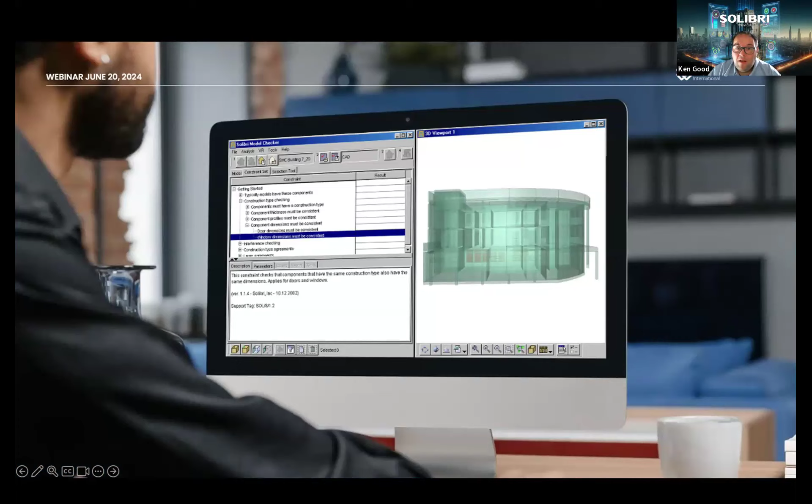Even at an early stage, if we look at this old school screenshot, which I really wish I knew more history of, what version and operating system it was, there are items in there that are clearly recognizable today still: the rule sets, the descriptions, the parameters, the 3D view, the toolbars. Those are still common themes that we see today in Solibri Office.

Moving on a little bit beyond those early days, the relationship and how we actually worked with IAI as it was in the early days before it became buildingSMART, that started early on in 2002, and then as names changed, 2X3 became the predominant version available. We've been involved through all these versions, and then in 2009, the start of the development of the BCF standards.

We worked on that, or Passy worked on that - the guy in the middle from the previous photo - along with Tekla to develop that standard, and today that is now our preferred communication format, whether it's an offline file or through the cloud to some sort of online CDE.

But coming back to the guy in the middle, still in the middle, still wearing a jumper - there is a story behind that, but I'll leave Passy to explain that one.

This relationship continued over the years, but in 2022, Passy was actually awarded an honorary status as a buildingSMART fellow for, and I need to read this bit, significant contributions to the work of buildingSMART and the advancement of BIM. So Passy's been involved through all these years and has pushed many different things, and he's still involved today, continuing with new buildingSMART standards like IFC 5 or IDS more recently.

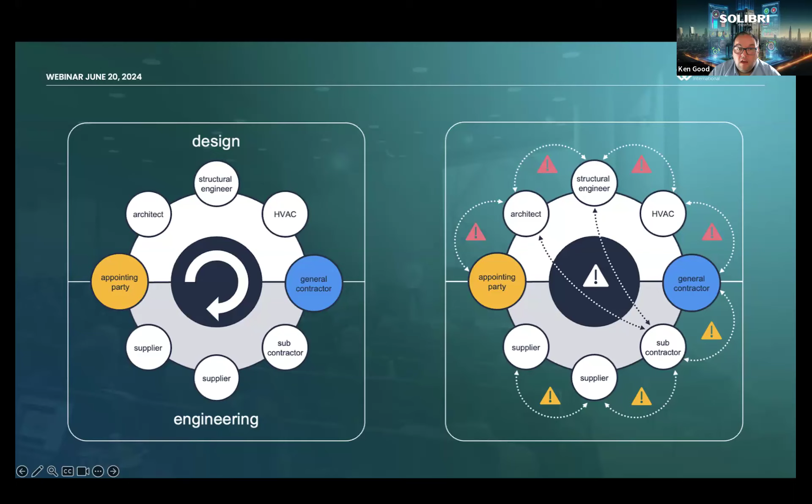But the main thing to summarise is Solibri's place in all of this: we allow project partners to validate, coordinate the various different models from design, engineering, different disciplines, wherever it is. Doesn't matter what authoring tool they use. Because we're basing it on IFC, people can use a preferred tool, export to IFC, and then that's the basis for the various different bits and pieces of checking that can go on from there.

We can also communicate on all of the major CDE platforms. We can use BCF, the Documents API, the OpenCDE standards. We're trying to be as open as possible to allow as many people as possible from different backgrounds, different platforms, all to be able to communicate and collaborate on projects. And even lately, the IDS, the information delivery specification, is becoming more to the forefront of things - we also support that platform as well.

So what I'm going to do is wrap up that brief history of Solibri. There's no point me talking about it because we have Daan here who can give his insights from a user's perspective. So I'm going to hand over to Daan from JaJo's, and he can share these insights from his own perspective.

So let's have some use cases on how JaJo's uses openBIM for our collaboration. Not too much about me, but this is me - I am Daan, I have over 20 years of experience, more than 10 in the BIM industry. Related to this, I have co-created the BCF infographic, which we will talk about in a minute.

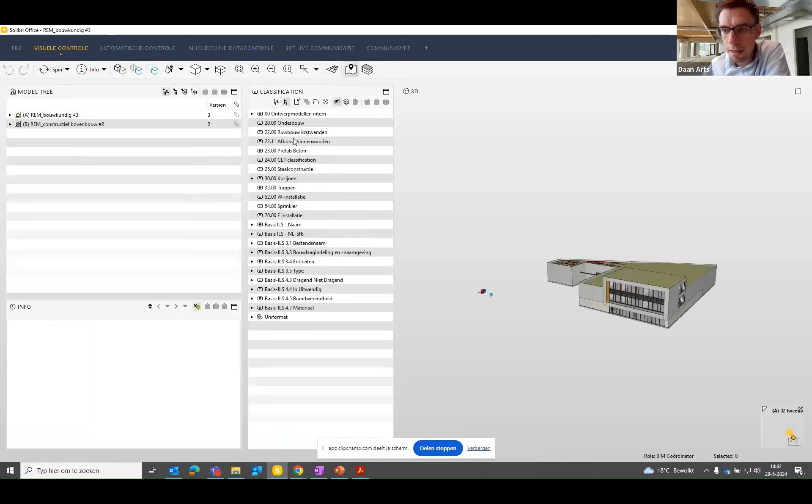So we're synchronizing those two models in Catenda. That part was actually real time, so you can see how quick that is — that's really amazing. What you see there on the left is the same name and revision number as in Catenda, so that means there is no discrepancy between what we're doing.

So that's already awesome. Okay, what you're seeing here, maybe it's going a little quick, is faking an upload of a new revision, and then it uploads that in the other software as well. You can see it has the same revision number again as in Catenda.

Can you see my mouse, by the way? Can you see this? Håvard, can you tell me yes or no? No, you cannot see my— okay.

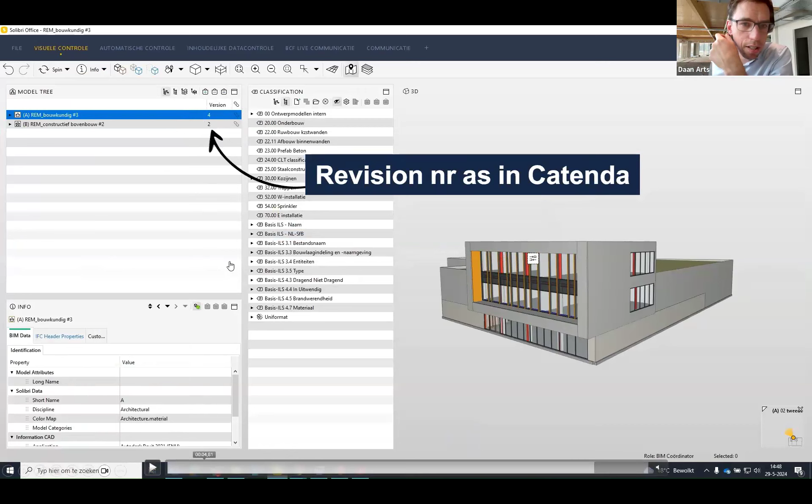All right, but anyway, so what you see here again is the same revision. We're collaborating between two platforms, which is, again, in my sense, really amazing. So what you did see is synchronizing models — it could have been documents, PDFs, or whatever, but we synchronized models. What you didn't see is uploading or downloading.

So this is what's happening. We're going up and down without any downloading into your Explorer and then uploading into somewhere else, and a lot of work placing documents at different positions. We're synchronizing together, and I think this is very powerful. This makes our engineers' work very comfortable.

So let's move on from this. How does that help us? It helps us eliminate discussion on revisions, again, because we're synchronizing. There is no downloading, there is no discussion, and it prevents unnecessary mistakes.

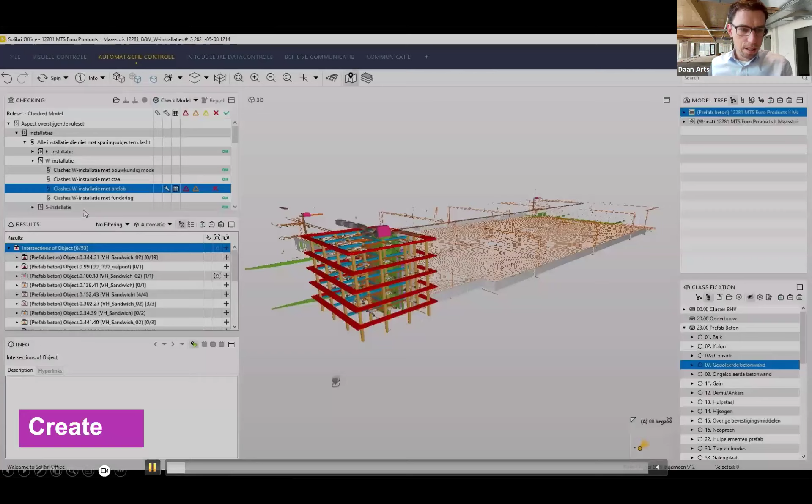So now we're using Solibri again. This is where I use some advanced rule setting, but we're not going to talk about that today. We're talking about this. So I created an issue.

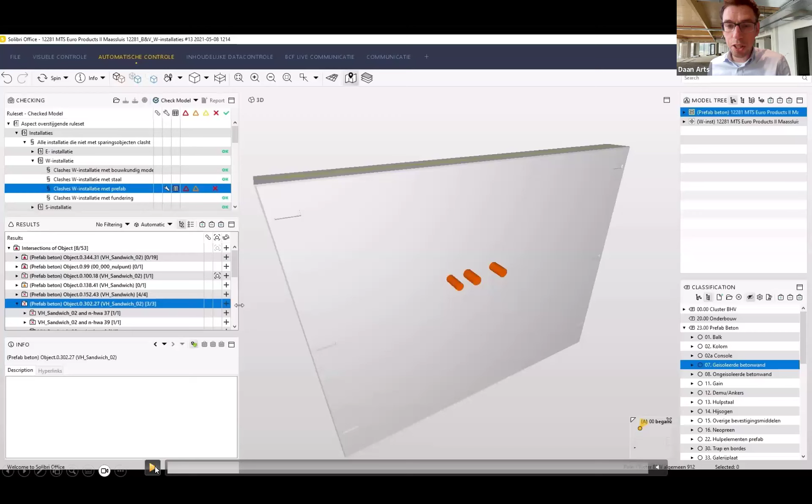As you see here, there is a concrete wall and there are 3 pipes going straight through it. That in by itself is interesting enough. So we're actually visualizing a problem. Next step is to create that topic or issue.

Those names are kind of mixed together. So we're creating a name, we're creating a description of that topic. We are then, when the description is finished, going to add a status, so metadata, and a responsibility.

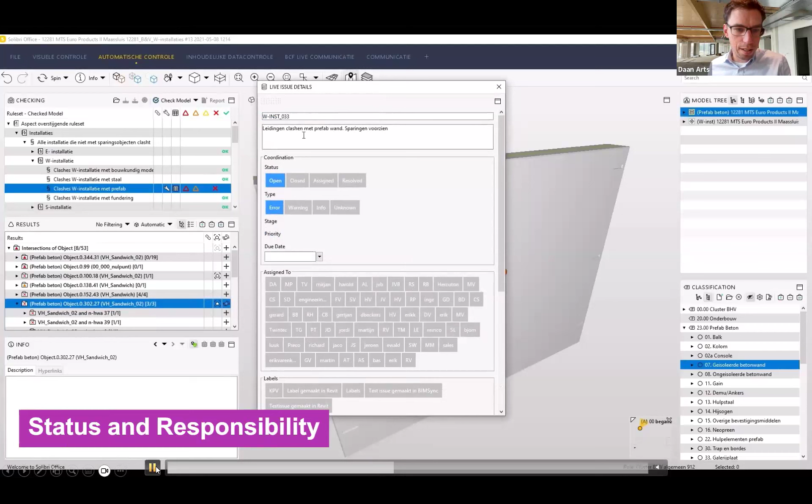And that is obviously very key because, again, when you're emailing it, you're not really sure where that is all going. But if you're now attaching somebody who's responsible, that is very powerful because you know exactly who's responsible for what, and this is the key part.

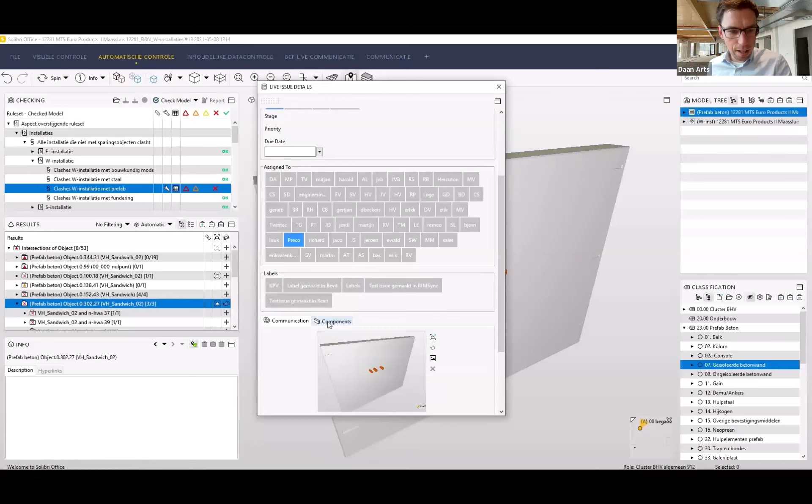These are the components. All right, so you see here components, and those are the things you see on the screen, and those are obviously when we're talking about BIM, these are the most important.

All right, and now the best part is again communication between 2 vendors. We're synchronizing this through openBIM, in our case with Catenda, and here you see all the communications I have in this project.

I click on that topic, and what you see here is the same name I just typed in, the same description, the same status, the responsibility of that person or group, and all the objects. So I'm using 2 different softwares, and I'm doing exactly the same thing, and we're talking about exactly these objects.

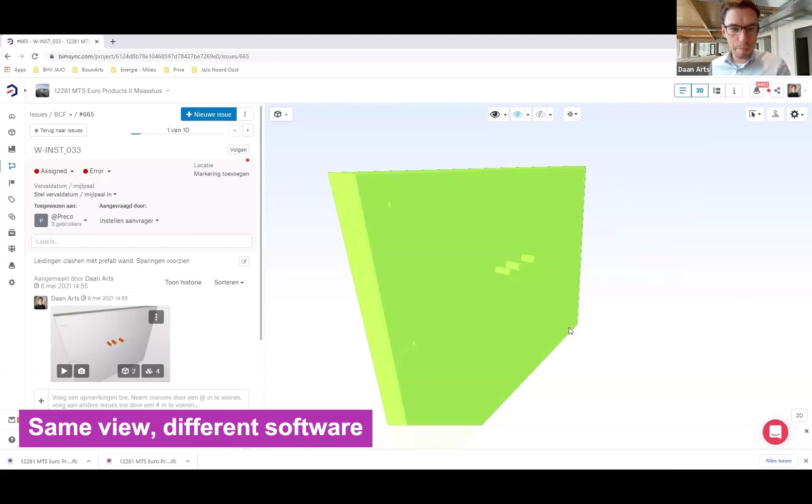And this is in a different vendor, but I'm straight away going to this problem within my BIM. So that's obviously amazing because then I know exactly what the guy who made this issue is talking about, because he's talking about this wall, not a wall, this exact wall, and these 3 pipes. So same view, different software.

And I think it's been out there for a while, but we see that a lot of people are still not using these types of communication. And then we feel this really is a great thing.

But go out and check that website. There's also some manuals which will tell you and help you out how to use the BCF in your vendor software. So volunteers got together and created manuals for instance, Solibri, but also for Revit and for Tekla and ArchiCAD and all those kind of systems. We have manuals which tell you how to use BCF properly so you can communicate in an open way.

So that'll help you out. Finally, I hope to inspire you that open communication and working with this open standard is not just done with clash detection or the things that Solibri is known for best, but we at JaJo use it in a couple of different ways as well.

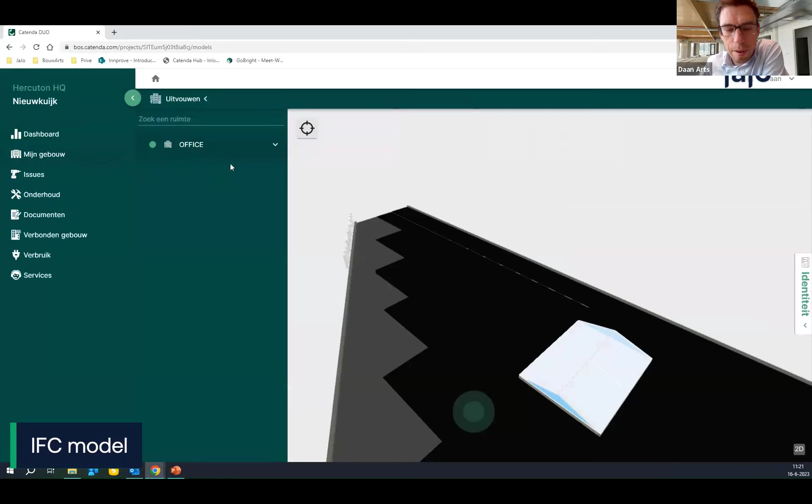This is one of our offices that you will see here. So we're going through the dashboard, and eventually we're going to simulate if I have a problem in my building. So this is now a web version, but this is also on your phone, so you can scan the QR code and go directly to your room and create a problem or a leak or whatever it is in your building. So doing digital twin kind of stuff.

So we can walk around the BIM, that's great. So there are 2 functions here.

There are 2 main functions. One function is that button which shows the problem, and then there is a documents button. The documents button is really cool.

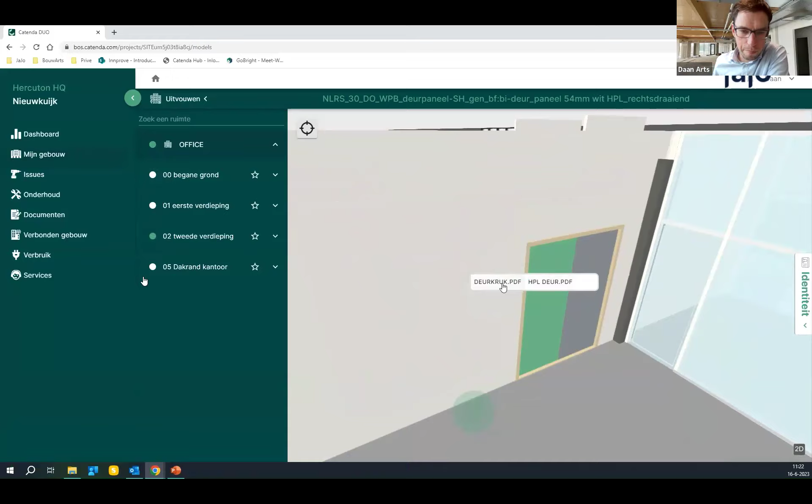It seems so simple, but anybody who's ever done maintenance knows that when you get a call about a problem with a door, their first question is: what door? And the person on the line says, yeah, exactly, what door? I have no idea, just come over here and fix it. So you drive over there, look at the door, and think, yeah, you're right, it is broken.

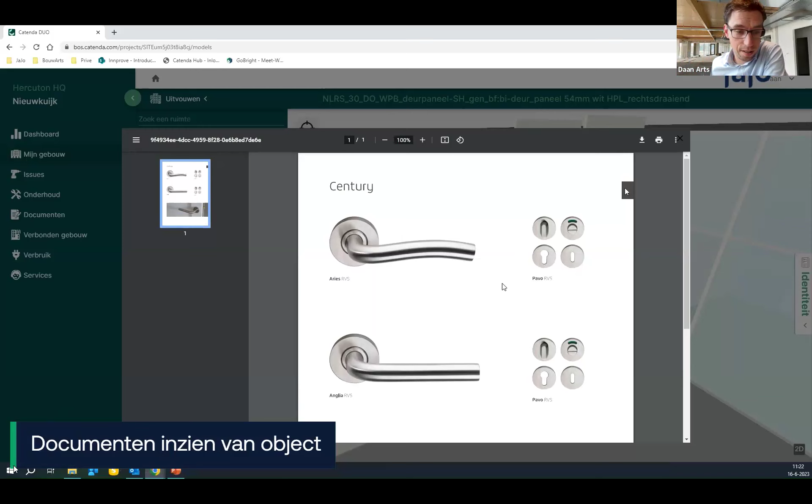He writes down whatever he needs and drives back again, hopefully doing that relatively okay. But what you saw here is you do that same thing, except you click on literally the door that is broken, and the documentation of that door and everything around it is directly available. That is huge. I've talked to my maintenance guys and they say this is going to save us a lot of time. That's step 1. That is actually not the BCF part, but just a cool feature I love to show you guys.

So it's an open standard, which is important to us. And why is it important to us? This is part of it, because it flies directly to the object it refers to.

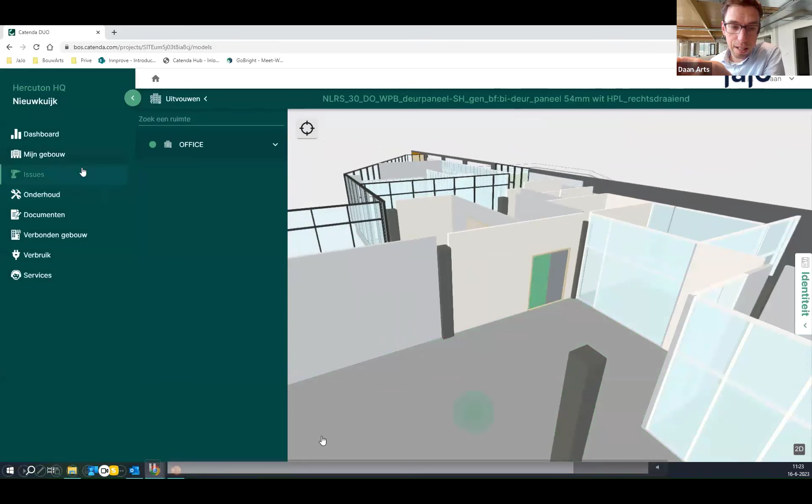And the second best part — this is all the list of all the topics — is that because it's open, the programming to our software and our ERP system is a lot easier, since we know exactly what to expect in the code, because it's already written down in the open standards. So we create tickets for our buildings with open standards, and they go directly to our own ERP, which is made easy because it's open. That makes it a lot more cost effective than programming another program.

That's use case 1. Well, I think that's the same, so I'll go to the next one. So number 2 — how to translate that one — let's just say project management.

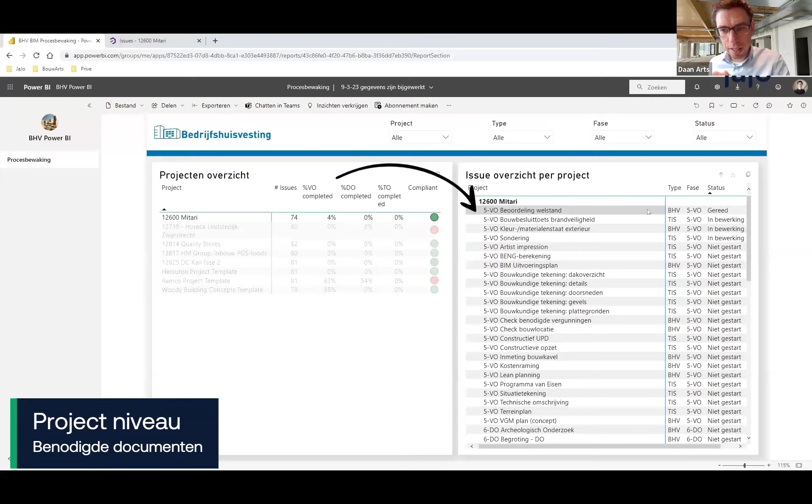What you see here is project management — a couple of our projects. On the left you see about 8 of our projects, and on the right you see topics of that project. Instead of going into one project and seeing all the issues, here we can see all of our projects at once. That's quite cool — we use all the data we have in Catenda and access it in our Power BI dashboard.

And again, because it's open, it's easy. This is just one project — the Mitari project you saw just now. Here again it's the same data, but without entering Catenda. We have our own Power BI dashboards with access to all our Catenda projects, and there we can maintain what the status is of our documents.

So the use case here: you see names of documents that we need to finish at some point in the project. It's like a project management tool, and we can change the status, change who's responsible, and set milestones and so on.

Because we can do this for the project team, which you see here, and just now with the Power BI dashboard, our management can have proper insight into all the projects in one dashboard — what is the status of all the projects. So we can have a lot better insight. That's what we do here. Hopefully that's a fun use case for you guys.

So let me just finish that video, which pretty much shows you exactly what I said. Again, open standards, and we can do everything. We have a lot better insight.

All right, final video to inspire you a little bit is not this one. There you go, is restoring an ancient wall. That wall is about 1,000 years old. I guess that's not ancient, that's medieval I suppose, I'm not entirely sure. It's older than me, so that's old.

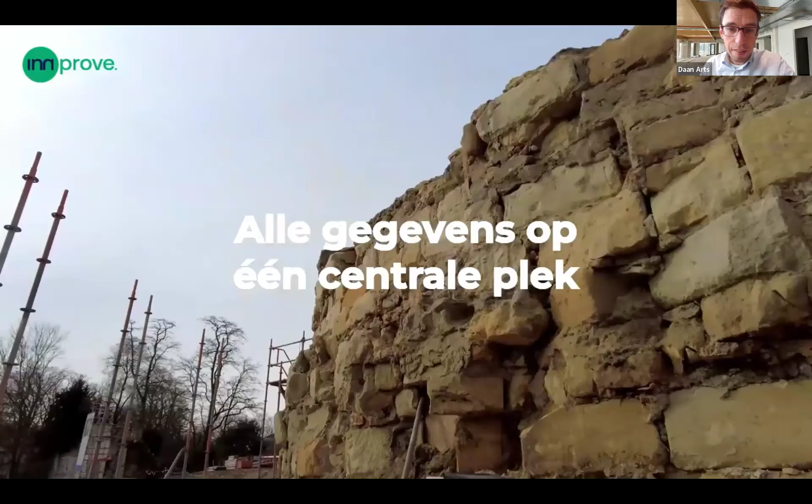So let me show you that video. So we registered every stone. Let me just translate that for you. We have a better insight into the entire project. We are working smarter, and again that's single source of truth.

That's what that said. And that's me meeting our project manager. Welcome to this project, and we have the restoration project here, which looks awesome, right? If you guys are into restoration, this is amazing. This is an old wall, again, almost 1,000 years old.

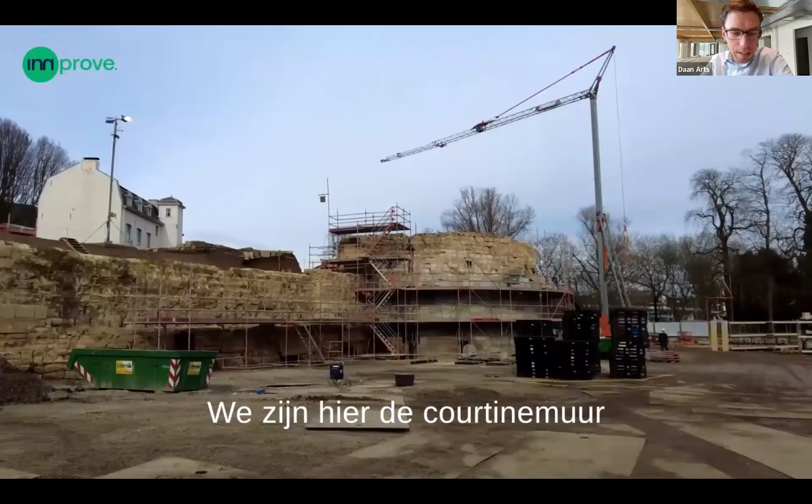All stones need to be taken apart and need to be stored. And you see that here, 2,500 stones are taken off that wall. You see the back and temporarily stored. So how do we do that?

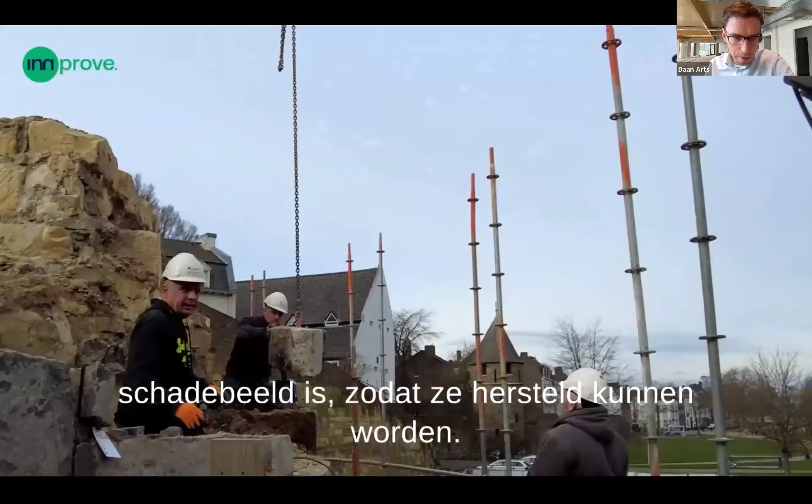We take one out, you see the guys taking one out. They put a QR code on that stone. We scan that QR code and go directly to the Catenda system, which then shows you all the information of that stone. You see that here? It's a QR code, we can scan that, and it goes directly into the system.

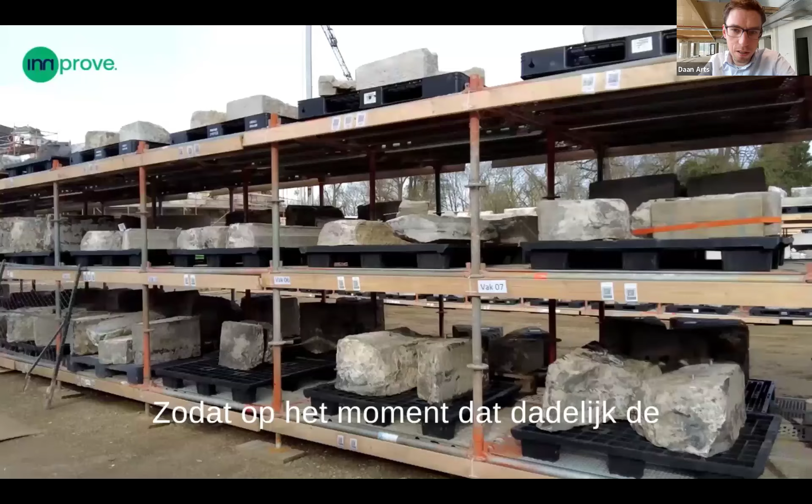And the system also says where those stones are stored temporarily. There you go, we're accessing it, going directly into our Catenda system, and we add some data to it. We can add pictures, there you go. And here is the temporary storage. Again, they can scan it and they know where they are.

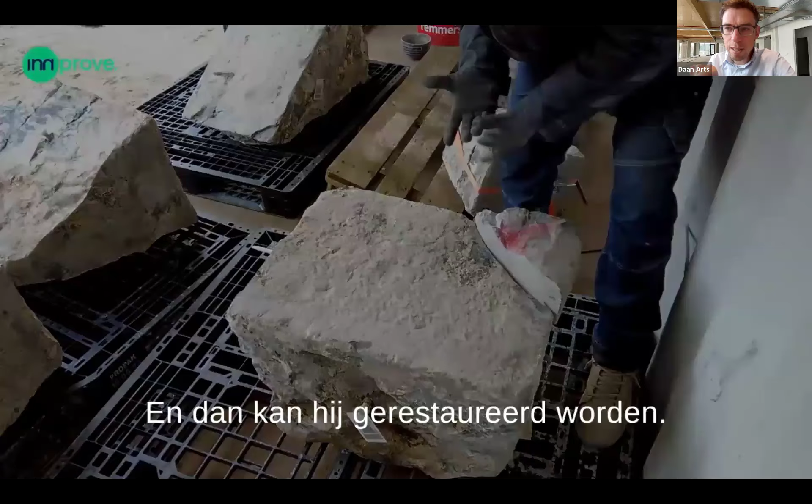Right now, this guy is restoring one of the stones. QR code is still there. While it's being restored, we change the status to 'in restoration' or whatever the status is. Goes back to its temporary storage and then goes forward.

So that's cool. So how do we use BCF? Again, this is the pages as well. These are all the stones, properly filtered, we can pick out any stones. Again, the same things you saw before with status and who's responsible and when and how and where.

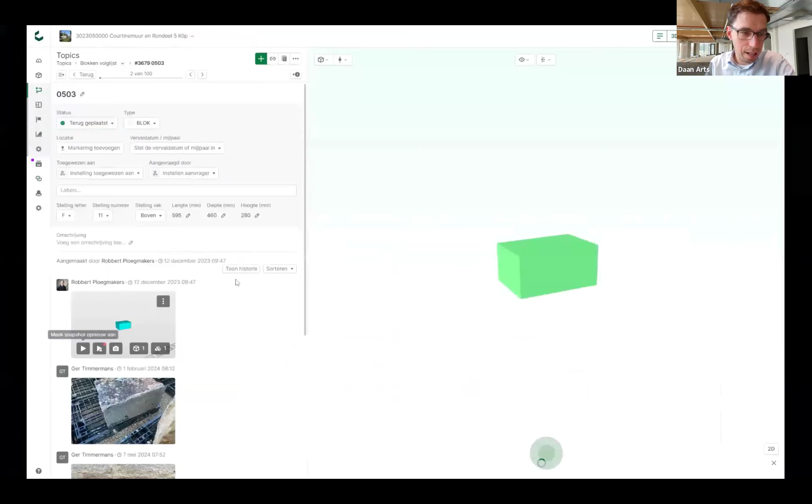It's all there. What you see here is the BIM part. We actually created that model of that wall in our model. So we're talking about that stone. So where is this stone? The stone looks like this. And that's the 1st of February.

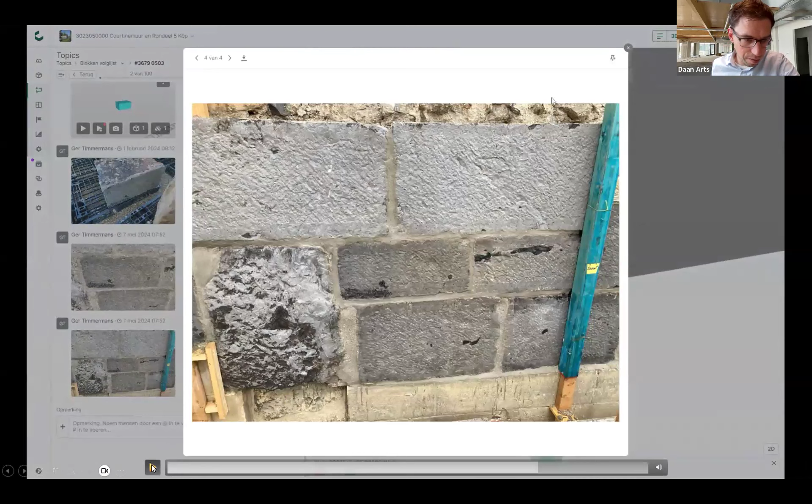Let me just pause that for sake of argument. Go back one second, oh you can see it right there on the left. And then now, the 7th of May, it is placed back. So we're doing, this is the 7th of May, and now this is the new version. So this thing is already placed back.

So there you can show the history of all the changes that's been made. We are tracking the changes. For those people who cannot read Dutch, let me tell you what happened.

He took out the stone. He then placed it into storage F11. It was then changed to stored. Twelve days later, the status was changed to 'we need to reuse this stone'. It's possible. And then somebody changed their mind - no, we'll replace it, no, we're going to reuse it. Somebody had a change of heart.

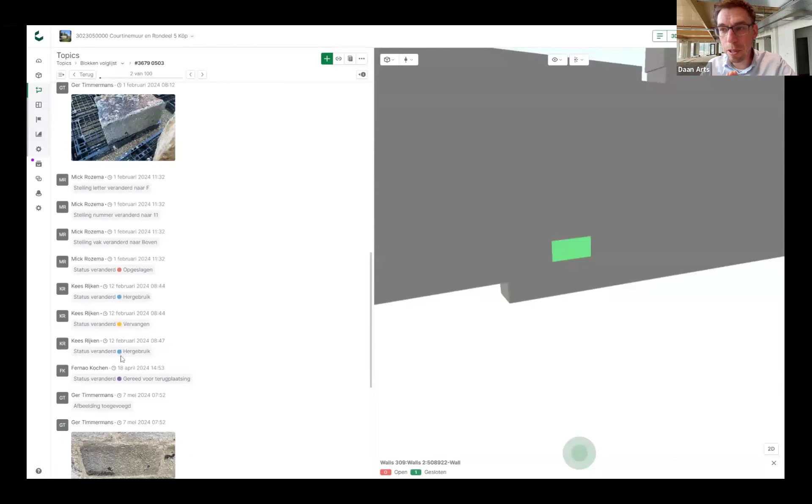Eventually, on the 18th of April, it was said it's good to go to place back. And then you see on the 7th of May that it is actually placed back, with a picture of the final wall. So we have a complete history of what happened here, and this is important because our clients are actually asking for this - what is going on, what's happening. And so this is a great tool.

So we're using existing software to make this amazing piece of simple admin, because admin needs to be simple, right? And again, we use open standards and BCF to create a management tool. That is what we did.

But to collaborate effectively with everybody, there is only one way, and that is to work open. At JaJo, we believe that, and that's why we chose Catenda, because they have the same beliefs, and that goes the same for Solibri, all based on open standards. So openBIM for us is the only way to collaborate with our partners. Being a GC, that is the only thing we do, so I cannot recommend this highly enough to you guys. And that is my presentation. Thank you.

Thank you very much, Daan. Brilliant presentation, and really exciting seeing all those examples and what's possible through what you do. We've had some questions already coming in.

First question from Christian Frey - let me bring that up for everybody. Would the asset administration shell IEC 63278 be a useful extension for BCF to bring in asset information in a standardized way?